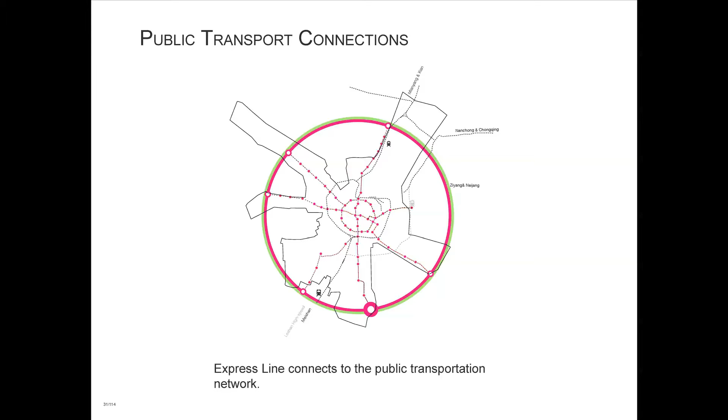And it will be connected to the public transport as well, the metro. So this is what it would look like.

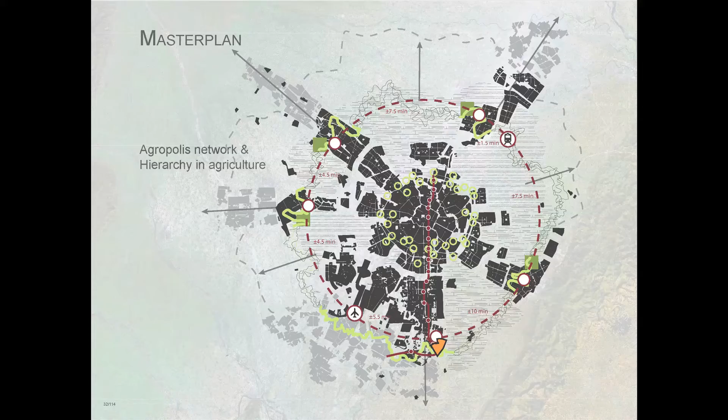I really tried to put all the wholesale, distribution, secondary processing, etc. into the Agropolis, which also has a lot of work for people. People can work there as well, and I want to cut all the travel costs, expenses and fuel consumption with it.

So people live and work almost at the same place. They live in this Agropolis, in this city, where they have all the amenities of the city, but can still work with their own profession. So actually it's going to be a place for farmers to live and also work.

To continue the story of high density, I want to strive for a form of compactness and not sprawl. So I want to make a stacked city with modules. But there's a difference between a horizontal city and a vertical city, because a horizontal city is flat, and vertical is more 3D. So the city center is more like a spherical center, whereas conventionally it's more just in the center.

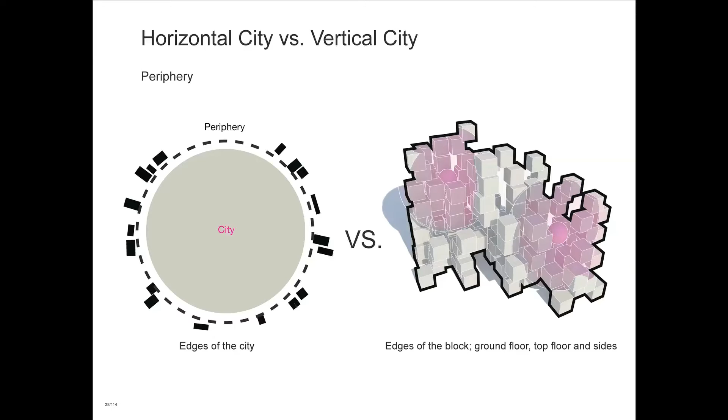But also the periphery is different, because the ground floor is actually kind of a periphery of the city. I don't want to have a lot of dead ends.

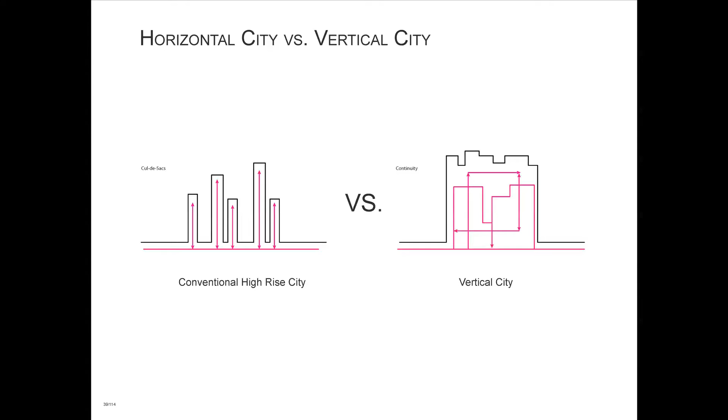The normal way to produce high density is a form of towers, where you can go up, and if you want to go to the next tower you have to go down first and then take the other elevator. I want to have some sort of people flow continuity within this building.

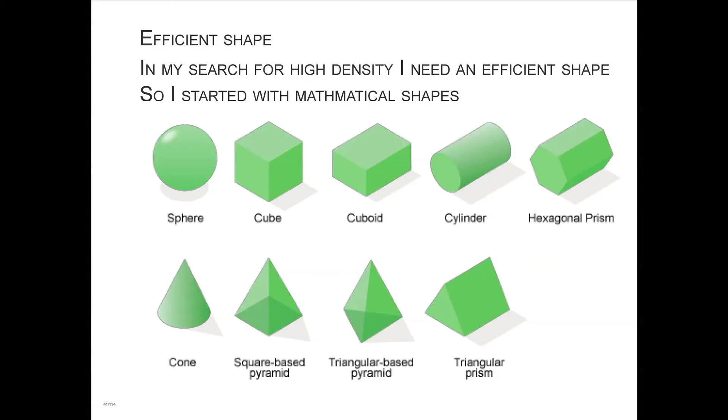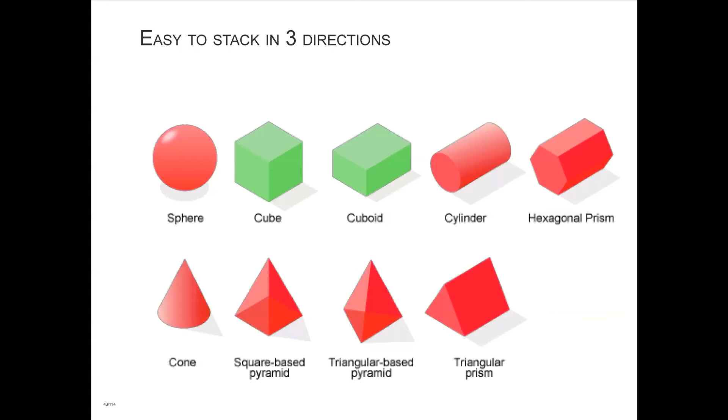So I made a lot of models to explore the possibilities, and I thought a module might be handy, which is efficient in shape and also stackable. For efficiency, I looked at some mathematical forms and took away those that are hard to stack. If you want to stack them in 3 dimensions, I thought the cube and the cuboid are the most interesting ones, but I chose the cube because it's more rigid.

But the problem with this was actually the amount of daylight entering the cubes in the interior city spaces. So I made a light study to see what was possible.

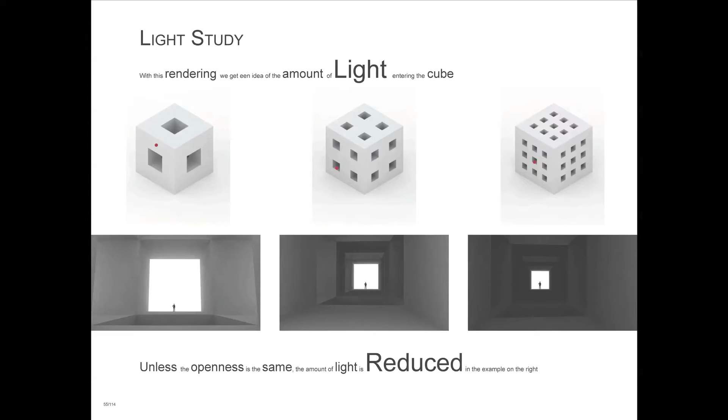So I cut holes into the cube, which was very solid at first, and I took some forms to study. All those 3 cubes have the same amount of voids, but different configurations. As you can see, the more holes you make, the darker it becomes, because of the narrowness - it's better to make one big hole than like 9 smaller holes or 4 smaller holes. So I also tested with models.

So for the density, I had this pure form, and I explored it a little bit more, and I tried to find an optimum between openness and density, to let enough daylight enter and have enough space left to make it efficient.

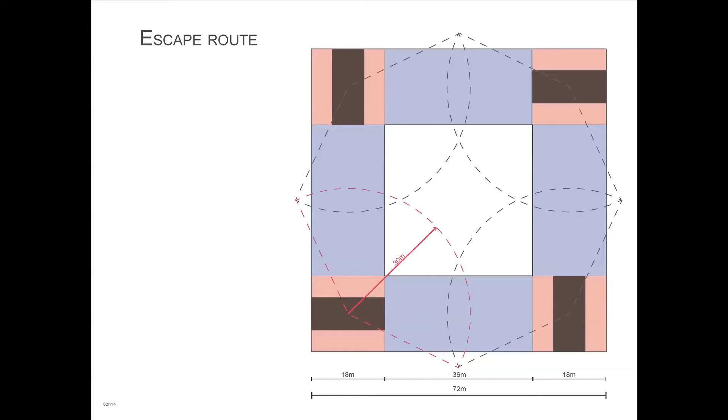When I found the dimension of 72 meters, I thought it might be a very good shot. It also has the potential of a long enough range for fire escape. So instead of a 40 by 40 cube, I scaled it up to 72 by 72 meters, and it became a very huge module.

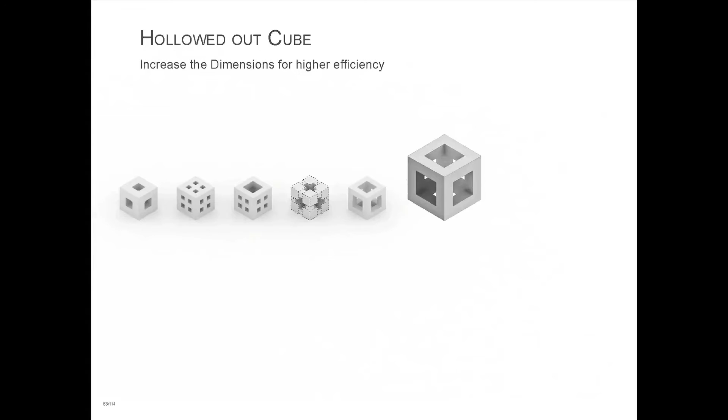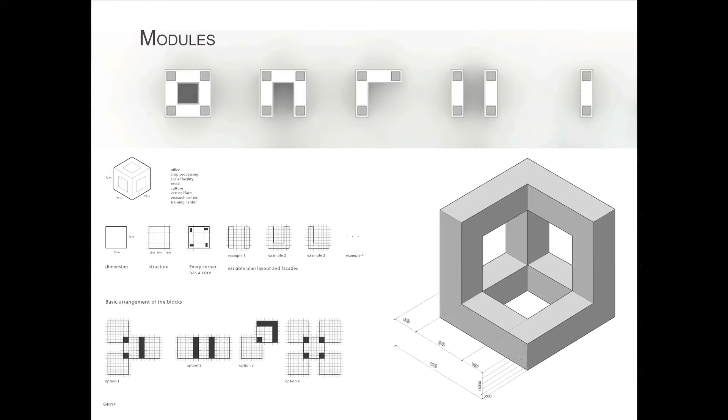I also explored how to stack them. For this module to work, every corner has to have a core, a vertical elevator shaft, and all 4 corners have to be supported. So there's no overhang or anything — it's just stacked, and all 4 corners are supported.

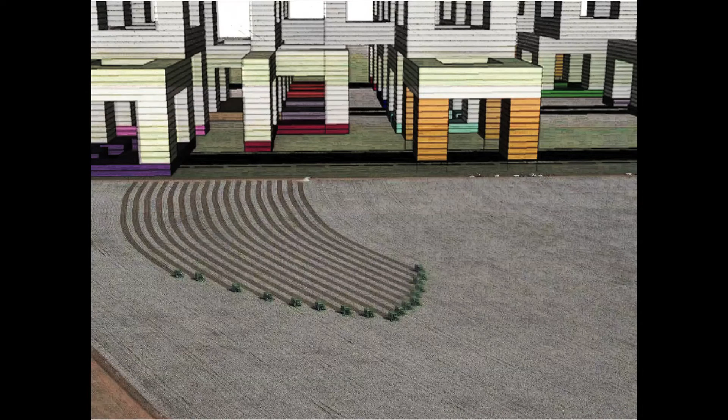There is also a difference in module shape. I started with only a square cube, but then there was a U, an L form, and an I or double I. So I made some variations, and with these I started to build a city with these modules — a city on the edge of agricultural land, so it really cuts through the farmland.

How does this city actually grow? I want to maintain the density from the start, so I wanted to begin with a small part, and then after a few years you can let it grow, partly like this. This already contains 40,000 people, so I'm almost there already.

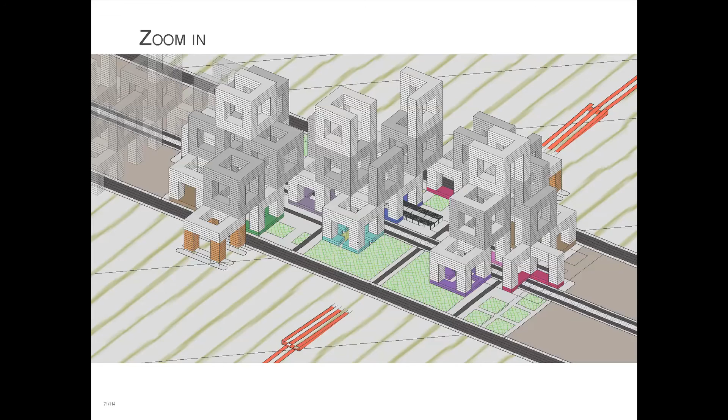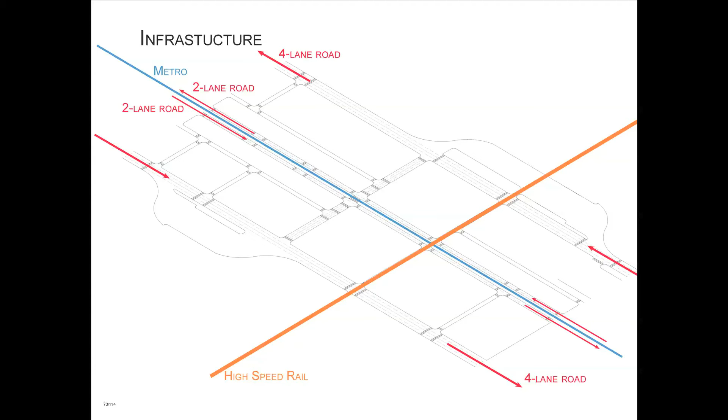So I'm trying to zoom into this part. There's a system of parking underneath, with on top an infrastructure of a 4-lane road going one direction, another 4-lane road going the other direction, and one in the middle which cuts right through the city with more cars, bicycles, and people walking.

This is more of a city street, for very heavy traffic, trucks, and all the food that is gathered. Then the layer on top is the landscape.

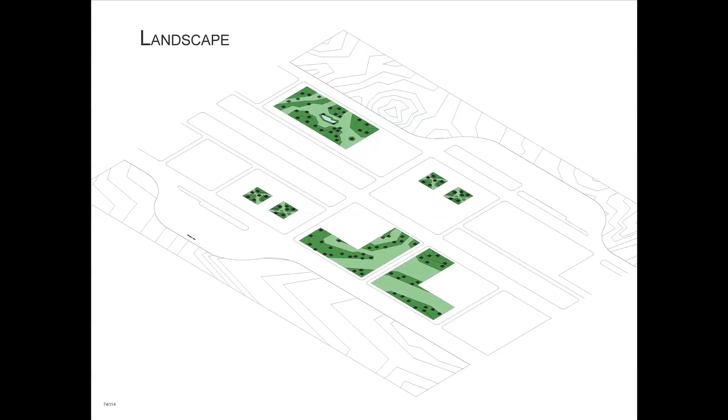On the edges is the farmland, and where a park is possible, I want to let the landscape enter the city. The height marks are essentially unchanged. On the ground floor is the program — this is where Chengdu city is, on the right.

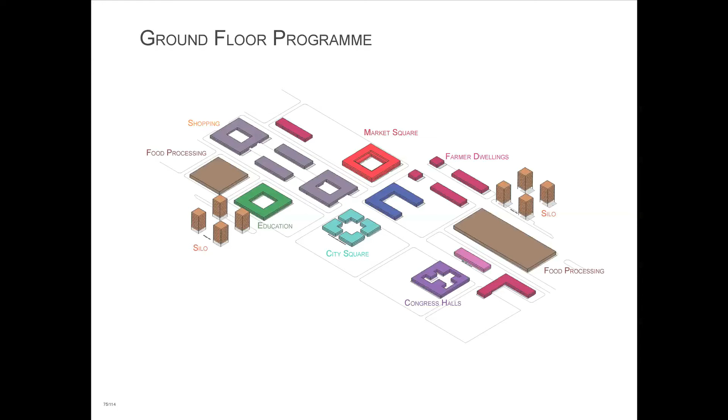We enter the city over here with the high-speed train. This is the city square, education area. There are silos on the side, farmer dwellings, market square, and that kind of thing. So this is what it looks like.

And this is where he works. I want this Agropolis to work together with the farm fields. There's some sort of biomass power plant where all the trash, leaves, and culms of the plants can go to be burned for electricity, heat, and hot water, which can be used by the dwellings. These dwellings house the farmers, and these farmers can work on the land again.

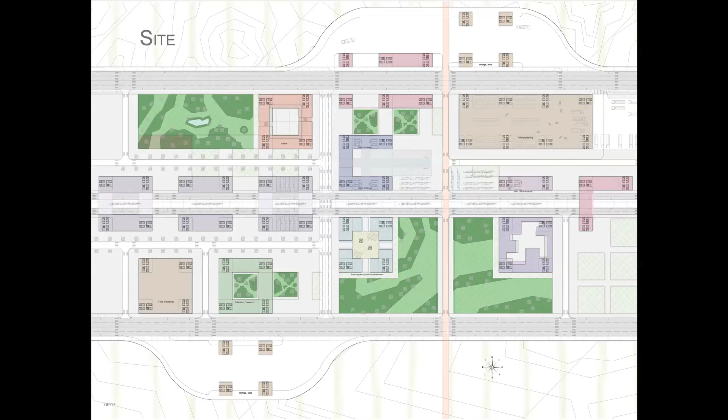So this is the site. You see the high-speed rail over here, and you enter the place over here. This is like the main entrance where you can enter the core — you can enter the city.

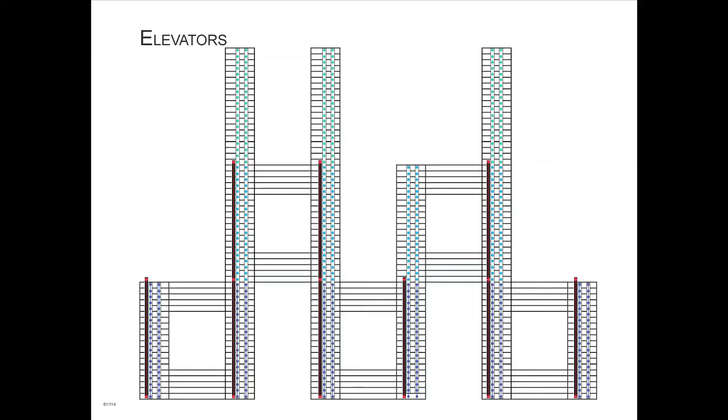You can go up with the elevators. The elevators work like this: the black lines are the high-speed elevators, which stop at the ground floor, the first floor of the second cube, and the first floor of the third cube. There are only 3 cubes high, which is 72 times 3 — already 220 meters high, and that's enough.

There's also a slow elevator which stops at every floor. If you want to go to a certain place, you take the high-speed elevator to the first stop, then change elevators and go up with the slow elevator.

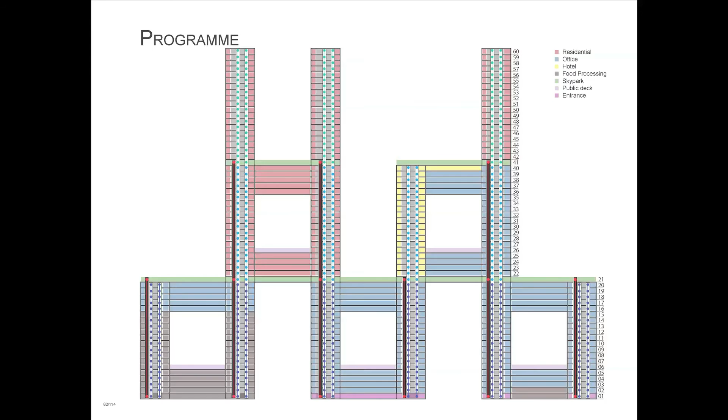This is the program. On the ground floor you have a lot of food processing, heavier machinery, office functions, and public entrances. Then on the roofs you have some sort of sky park, garden, and shopping streets. Higher in the Agropolis are mostly residential dwellings, where people live.

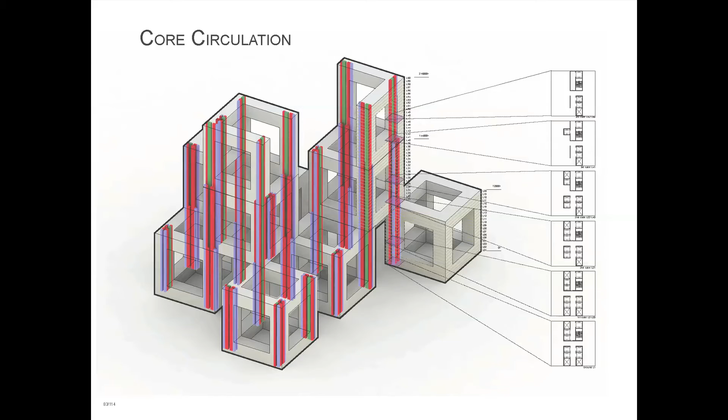This is what it looks like. The elevator cores get smaller as you go higher, to increase efficiency.

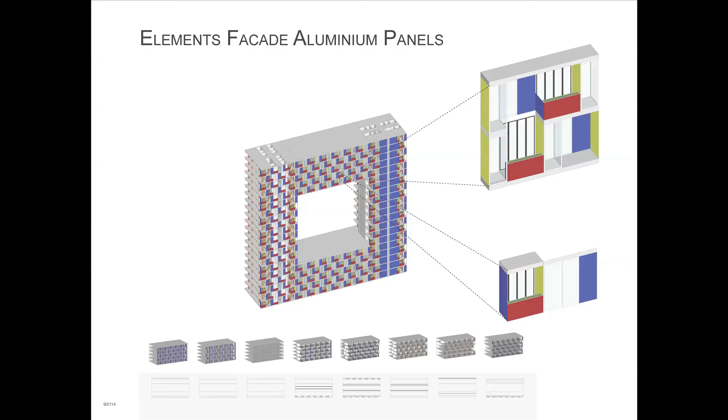First I thought of maybe some kind of aluminium panels, but I explored it a little bit more. I wanted panels from bamboo or wood, which is produced locally, and it's a lot more maintenance, but labor is not very expensive in China, so I think a lot of maintenance is not a very big problem there.

So this is what the facade looks like, and this is when you look out of the elevator core over the rooftop terrace with all the cubes in front of you.

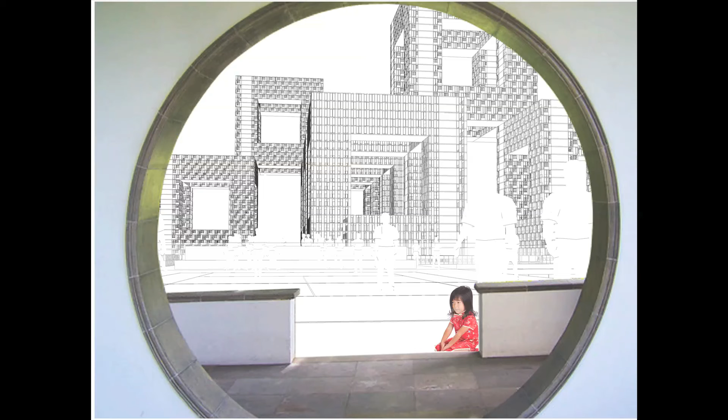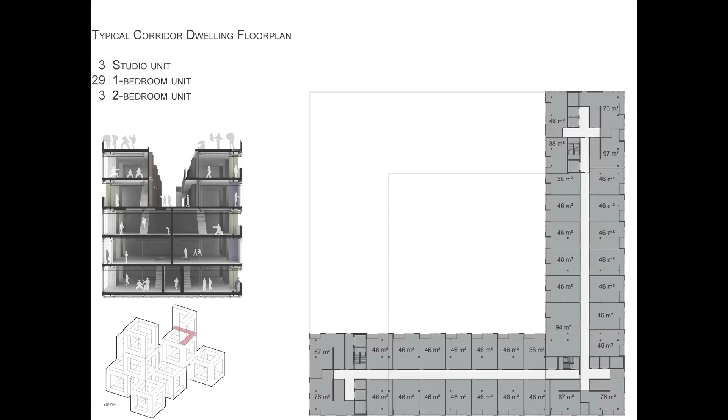This is a typical dwelling floor plan. Dwellings are not that big, but in China people are not very wealthy, and it's also for farmers. So I chose to make a lot of smaller dwellings, but there can also be penthouses or whatever. This is the interior of the dwelling - see, they're not very wealthy, but they're happy.

This is the section of the building. This is the big corridor, which was in the middle at first, but I took it up so now you have the natural daylight, and it's double height.

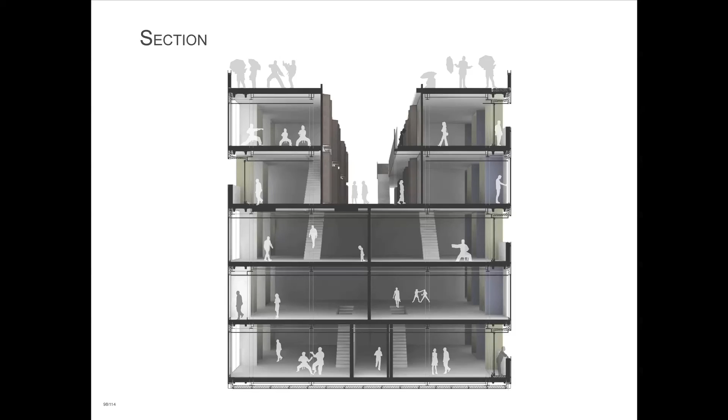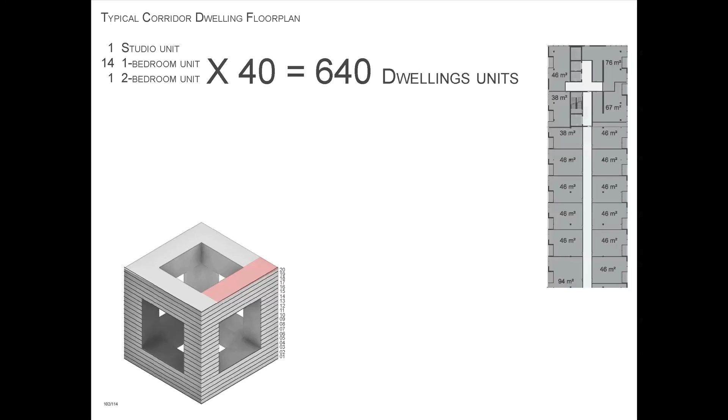This part contains 16 dwellings, which can be copied 4 times, and it has 10 levels. So 40 times 16 is 640 dwelling units. For the tower part, it only contains 4 dwellings, times 4 corners, times 10 floors, also times 40, is 160 dwellings. So 800 dwellings per cube.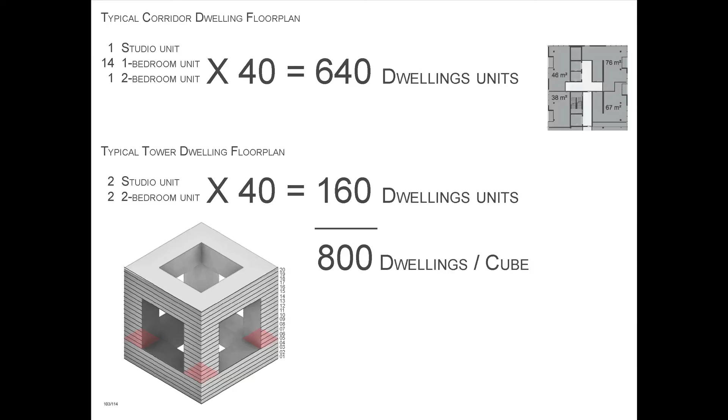With an average of 2.5 persons per household, this cube contains 2,000 persons. 100,000 people divided by 2,000 is 50 cubes, just for dwelling, to fit all the 100,000 people in there.

The brief was another 50 cubes of program for office, leisure, education, that kind of stuff. Of course, not all the dwellings are square, so they're also L-shaped and I-shaped. So I calculated like a 30% loss, so 65, 130 cubes to contain everything they asked for.

The part that I worked out was 0.26 square kilometers. It contained 22 cubes.

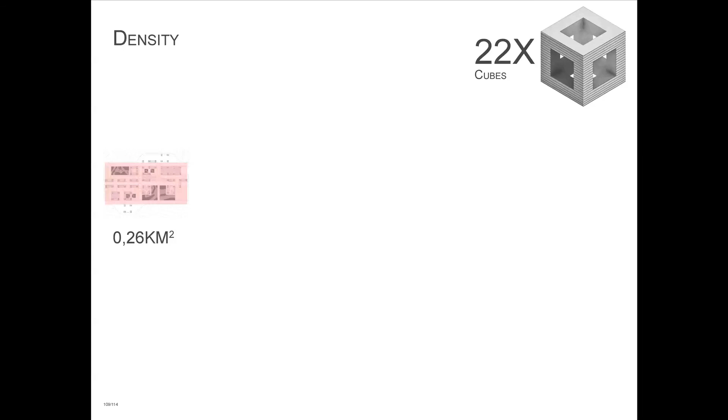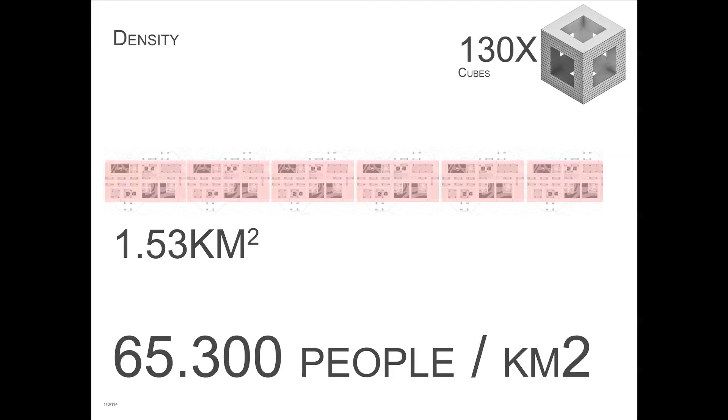If I do that like 6 times, I have all the 130 cubes I need, and I have a density of 65,300 people per square kilometer. If I compare that to Chengdu, which has only 3,600 people per square kilometer, they would need 26.8 square kilometers to house these 100,000 people, and I did it in 1.5 square kilometers.

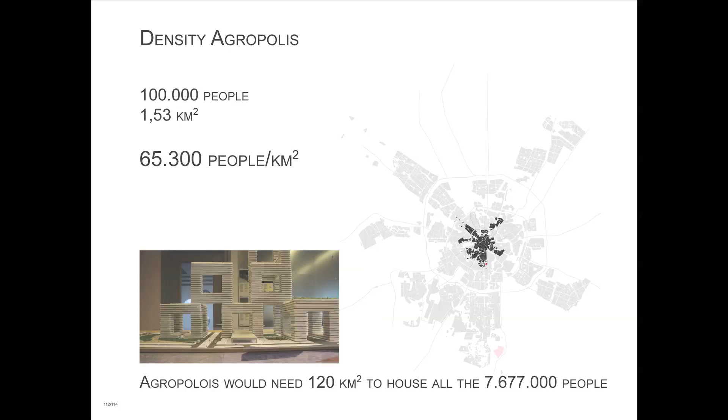On the other hand, if I fit all of Chengdu in an Agropolis kind of density, I would only need 120 square kilometers, but they exceed the 2,000 - they had like 2,100. So with the density of the Agropolis, all this could have been green space, productive land, and not swallowed by the city.